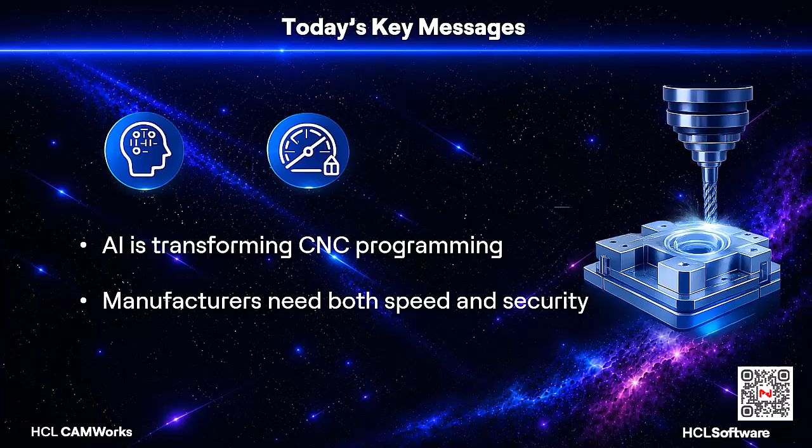Shops need faster workflows while maintaining control over sensitive manufacturing data. And advanced AI capabilities can be deployed on-premise, keeping data secure and local.

So we have a poll question for you today to start things off, and we'd like to know, how important is it for your CNC programming solution to keep data fully on-premise, not in the cloud? So why don't you let us know how you feel about that, and we'll go ahead and issue that poll. Hopefully you're looking at that poll now.

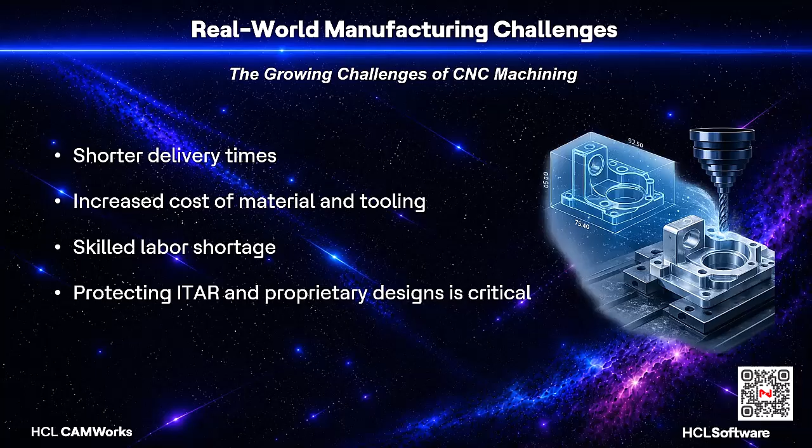So we have another poll question for you that's related to that. Let's go ahead and start that poll. What is the biggest challenge that your shop is facing right now? We have a couple of multiple choice answers there for you. But I also want you to know that if we missed your biggest challenge, you can also type it into the chat.

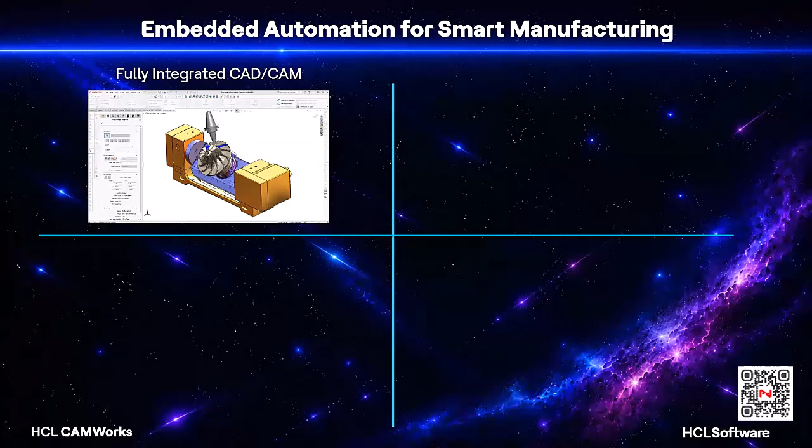All the CAD and CAM data is stored in a single file, and the CAM toolpaths are fully associative to the design model, so if a change is made to the design, the toolpaths will update automatically. CAMWORKS also includes feature-based programming. Unlike traditional process or operations-based CAM systems, feature-based CAM typically reduces programming time by 70% or more because multiple operations are created automatically for each part feature.

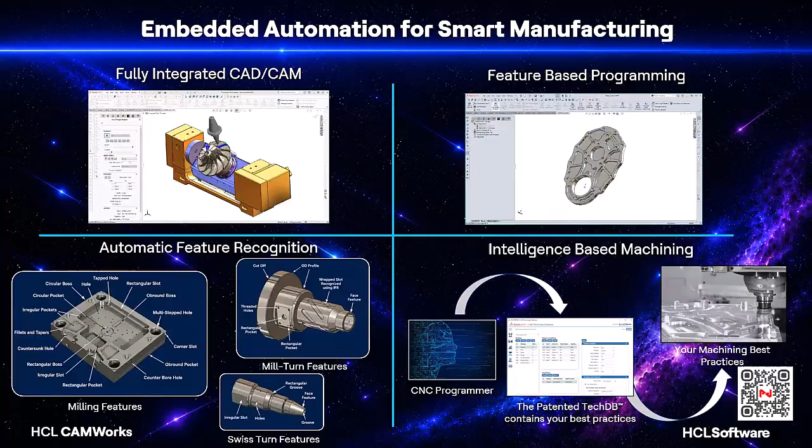And CAMWORKS also includes automatic feature recognition, and it's able to recognize over 40 different types of machinable features. Milling features, along with ID and OD turning features, are automatically recognized, as well as mill turn and Swiss turn features. And intelligence-based machining allows users to capture their best practices and reuse them later automatically. So next, let's take a look at this technology in action.

So here's a transmission cover that is in SOLIDWORKS, and you can see there's machining on both sides of this part that would be required. So a couple of setups. I'm going to go to the CAMWORKS feature tree here and then extract the machinable features on the part. So this will find all the machinable features automatically and put them into the feature tree.

I'm going to go ahead and generate operations here. And that generates all the operations. And then we can generate the toolpaths for machining. So very quickly, we're able to find all the machinable features, generate the operations for those features, and then create toolpaths to machine the part.

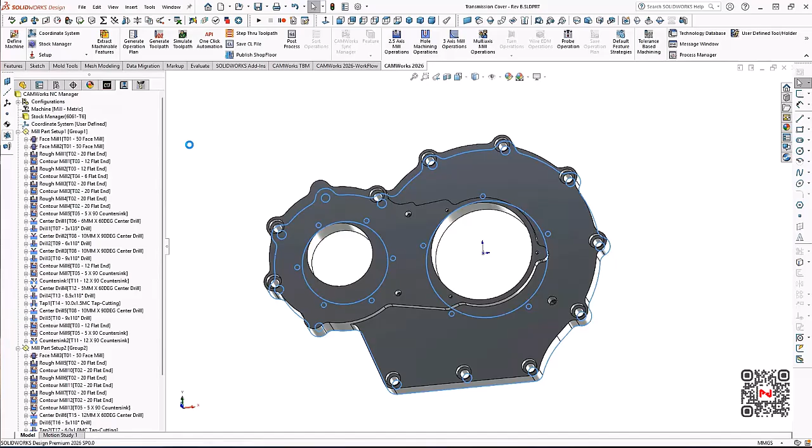And now I can run the simulation here, and you can see the part being machined virtually. So you can see both sides of the part have been machined. So 2 setups here. I'll compare the design model to the machined model, and you can see everything is in green, which is good.

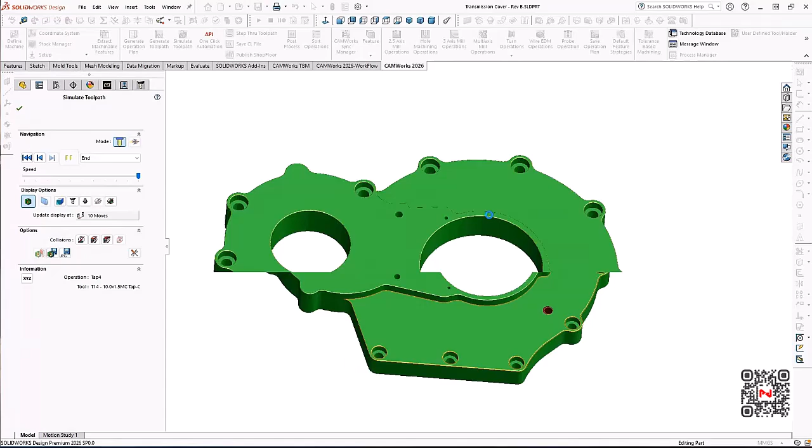And you can also see, if I zoom up here a little bit, let me turn this off. I'll zoom up and you can see where it's also been deburred. So the sharp edges have been chamfered here to deburr the part right on the machine. So all that was done for me automatically. Looks really good.

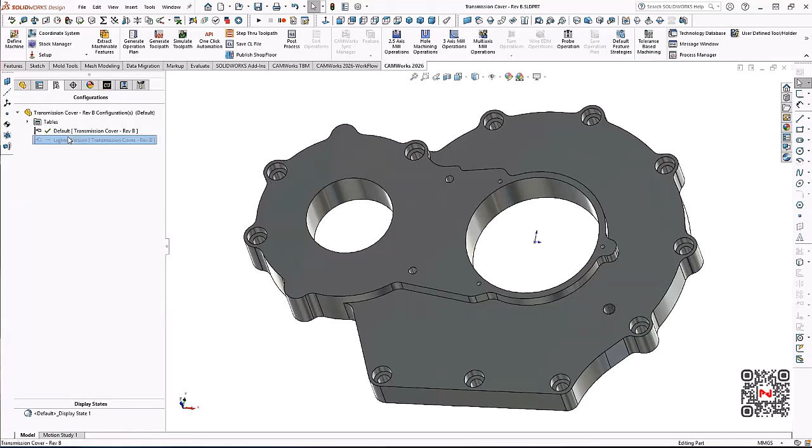Also, there's another configuration here where the part has been lightened. So it has lots of pockets that have been milled or need to be cut into the part. And you can see here where CAMWORKS also supports these multiple configurations. So I'll go to a second configuration, which is the lighter version. The default version is still there.

And now I have this new lighter version, and I'll go through the same process, just extracting the machinable features. And this now will find all the pockets on the part as well in this new configuration. It will extract all the machinable features, and it also finds those features with the fillets as well. And now you can see all the features in the feature tree have been added for the lighter version.

What I'll do now is generate the operations. This is the next step. So create all the operations for machining, and then go ahead and generate the toolpaths. And you can see down here where multiple toolpaths are being generated simultaneously using the various cores on the computer. So it is multitasking, you might say, using multiple cores to generate toolpaths simultaneously. So different operations and toolpaths are being generated simultaneously.

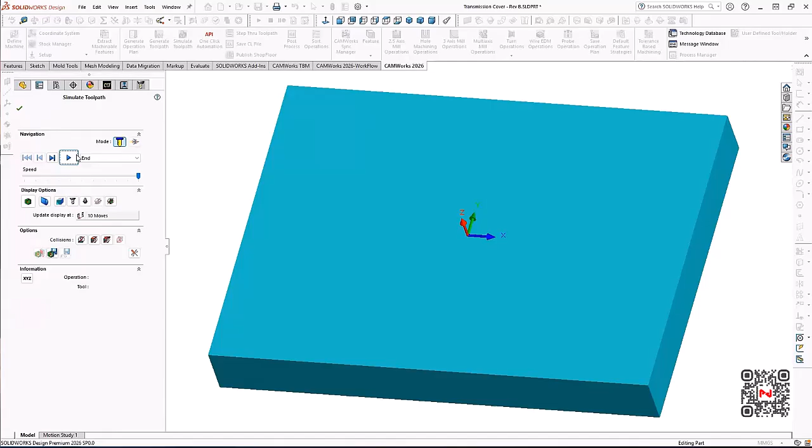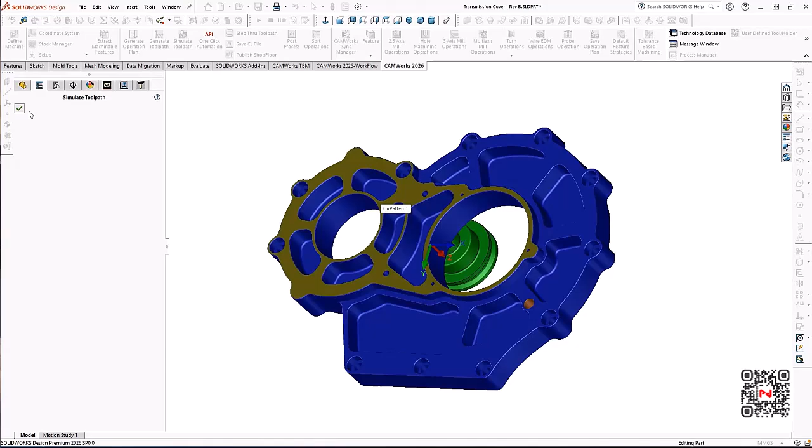Okay, and we can simulate now. And you can see the pockets being machined here with the fillets in the bottom as well. All right. And I can compare the machined model to the design model again, and you can see it's been machined on both sides of the part. And everything looks good here. There's a little bit of red there on some of those holes that were designed as the tap drill. I'm going to go ahead and create the G-code here.

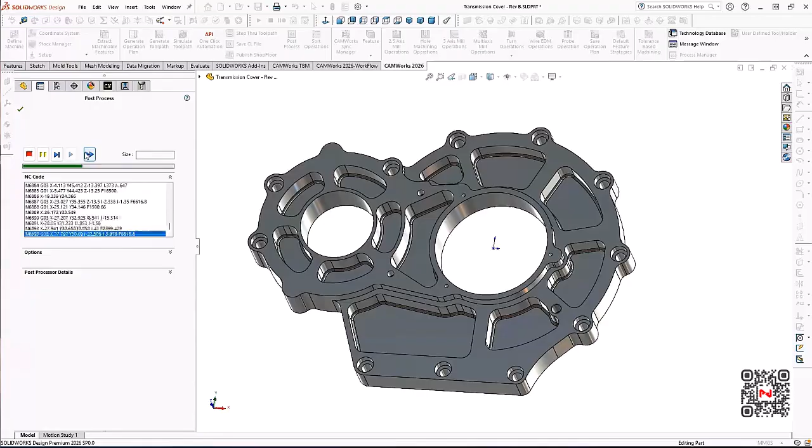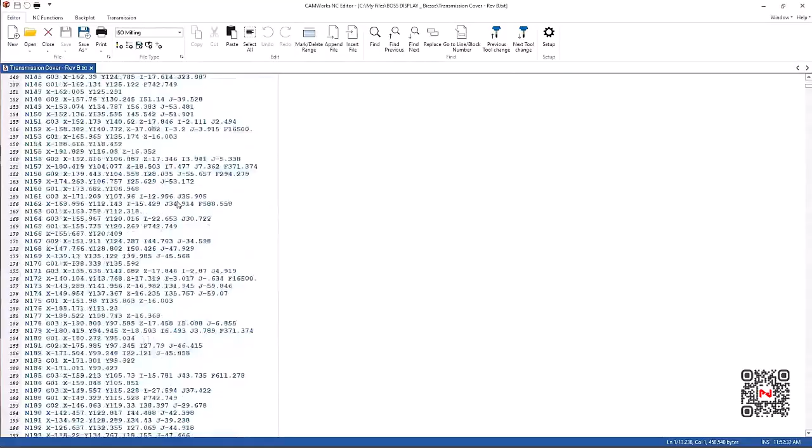And this will generate the G-code for the machine. So you can see how quickly I'm able to program using this technology. And this is all on premise. There's no cloud required. I'm able to program parts nearly as fast, or probably as fast as you could even upload a part to the cloud. So this is very fast for programming. And you can see the G-code here for the machining. This is the NC editor from CAMWORKS, powered by CIMCO. Okay.

So I hope you were able to see how we can greatly reduce programming time, how automated the process really is. As a result, new programmers can work with more confidence because they're benefiting from the technology that's already been stored by more advanced and more experienced programmers, and it allows for more consistent results across the various programmers. So you get away from every programmer having his own idea about what tools to use, and instead things become much more consistent.

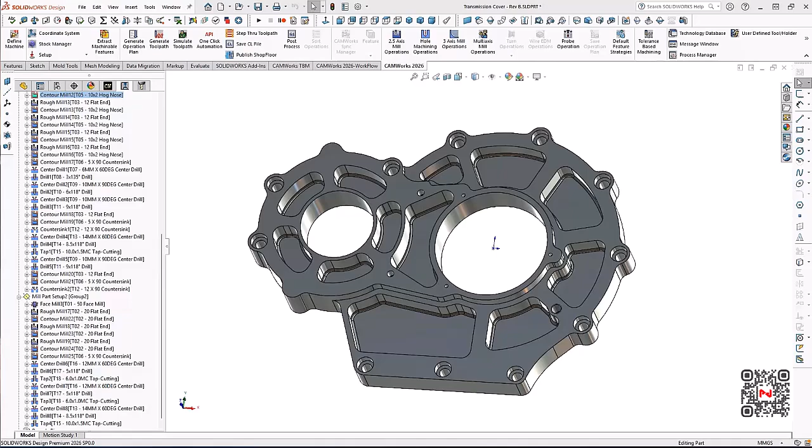It's best to take the best processes, best practices, and use those automatically. And that's what the system is doing here. In fact, we're going to talk more about that shortly. So let me move on.

So what does AI-powered CAM look like in practice? You can store machining strategies while you're working. So as you're programming, every successful program strengthens the automation. And you can build a feature library with proven machining strategies to create an expert system. And these features, whether it be pockets or holes or bosses or slots, any type of feature, once programmed, it's not part dependent. So you could have those same features on other types of parts, and CAMWORKS will be able to automatically program those features.

And it'll recommend the tools and operations and machining methods based on proven past results. And decisions become automated to reduce manual choices and apply established best practices. And the system continuously improves and becomes more efficient as additional data is collected.

So next, let's look at another example of how an expert system like CAMWORKS can automatically select the tools and operations for different size features and how machining best practices can be saved back to the technology database. So here's a part with various size pockets and various depths of pockets as well.

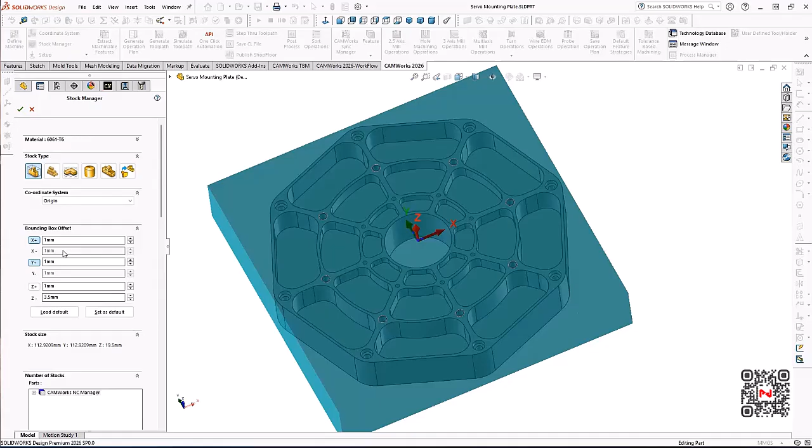And so if I go and look at this and go over to the CAMWORKS feature tree, you can see I have a Haas machine selected. I have my stock defined. It's done for me. And you can see here some defaults, a millimeter on each side, a millimeter on the top of the part, and 3.5 millimeters underneath for holding on to. There's also a coordinate system here that's at the center of the stock.

So I'll go ahead and extract the machinable features here. And now you can see all those and generate the operations like we did before. I think you know the routine here. I might combine the operations. This will help reduce the number of tool changes and also cut down on the size of the operations tree. You can see that there. And then I'll generate the tool paths for machining. And then go ahead and simulate again.

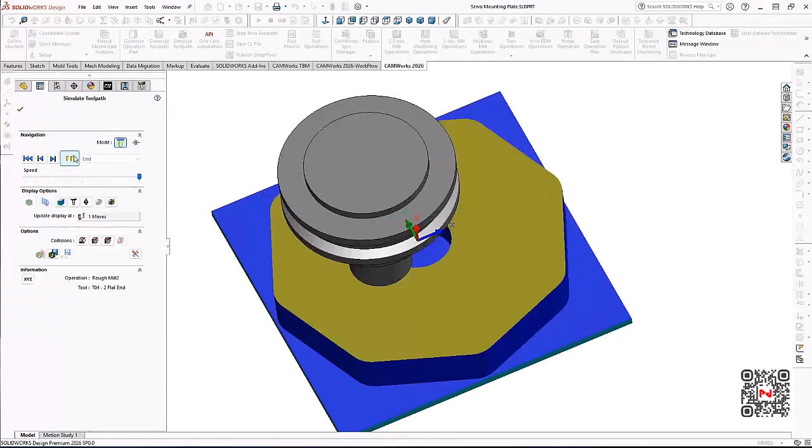And so here you can see where CAMWORKS has automatically selected different size tools for each of the different size pockets and different depths of pockets. It'll also do that for the holes and tapped holes. It'll automatically select the correct tools as well. Okay. So very efficient. You can see here where there's a 2 millimeter tool right here.

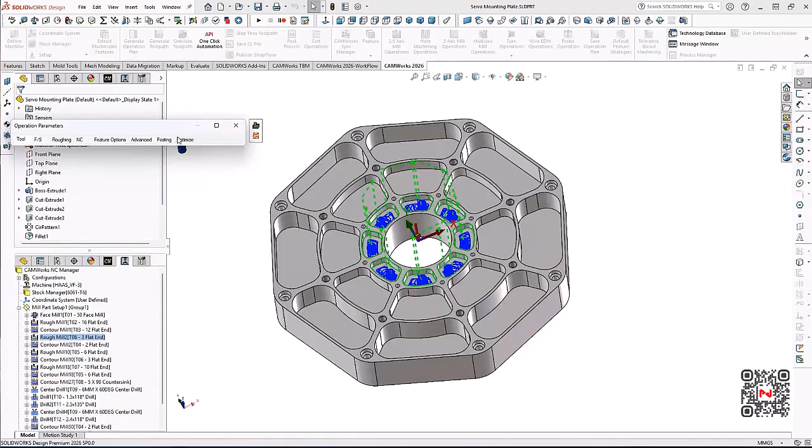Let's suppose I want to make a change here. So I'm going to edit this operation, and I'm going to change the tool, and I'm going to rough these smaller pockets with a 3 millimeter tool. And let's select that and then preview that. So this will rough machine with the 3 millimeter tool instead of the 2 millimeter. Okay. You can see that 3 millimeter tool here.

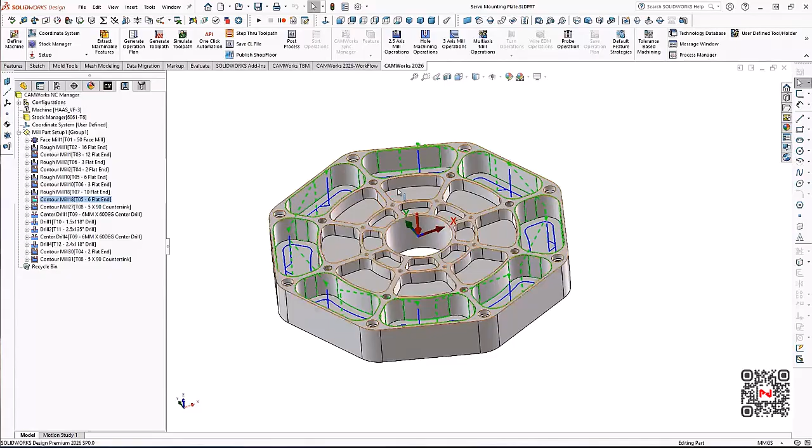Then it'll finish with the 2 millimeter, and a 6 millimeter and a 3 millimeter for the medium pockets, 10 millimeter and a 6 millimeter for the larger pockets. So automatically selecting the tools for me. You can also see where it did the same for the various holes that are in the part as well. So very efficient. And the technology really helps programming parts like these.

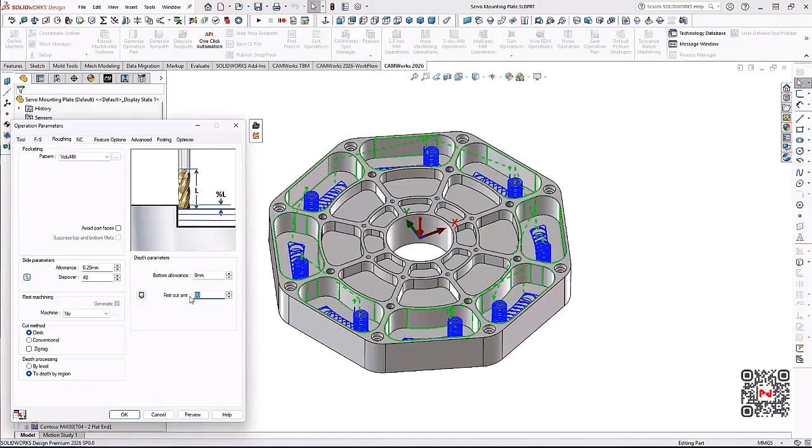Let's also suppose I might want to make another change. Let me edit this rough milling operation. Let's just suppose that at the machine, I had a problem where chips were packing up. So I'll go here, and on these deep pockets, I'll make 2 passes in depth instead of just a single pass. And if I zoom up here, you can see there are now 2 passes in depth there. So this will help with that chip packing out of the machine. Might have been something I didn't realize until I got out to the machine. And so I've made that change.

And you can see here, that's irregular pocket 17. I'm going to go to that feature in the feature tree. And I'm going to save that operation now back to the technology database. And I'll do the same thing for the 3 millimeter tool that we used on pocket 1. Let's save that strategy back to the technology database so that all future programs will now use the 3 millimeter tool for roughing on the small pockets, and it'll make 2 passes on the larger pockets. Okay.

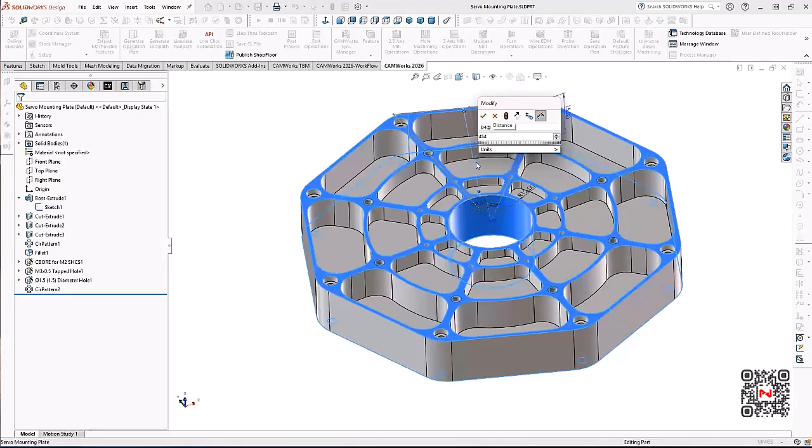Let's also suppose there might be a design change. So I'm going to go here and let's change this dimension. Let's make this 45 millimeters, and you'll see where the outer pockets, larger pockets, will get much larger, and you can see that there.

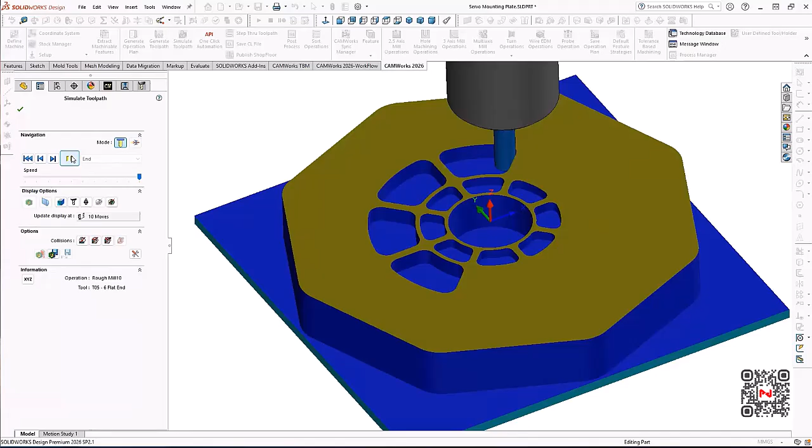And then if I go back to CAMWORKS, it'll automatically recognize that change and automatically rebuild the toolpaths for me. So the toolpaths are fully associative to the design model, and you can see how quickly it can accommodate those design changes, so revisions. And here it goes ahead and machines again.

And if I compare the design model again to the machined model, you can see everything looked good there and looks great. So it's all been updated. And so I hope you can see how one improvement will benefit all the future programs.

And programming consistency is maintained every time it sees pockets of these sizes or depths or material, or it can be different materials. CAMWORKS will select the correct tools and so on. And if it doesn't, that's fine. You can go and make a few changes and then save them back to the database, just like I did here. So hopefully you can see how this technology can benefit you.

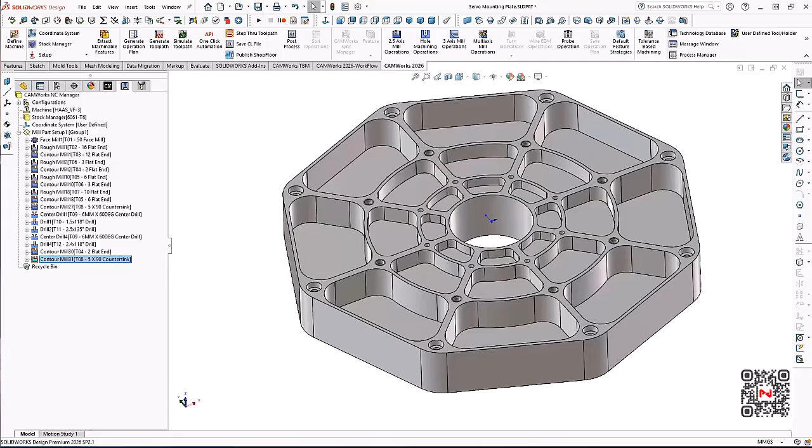If I move on, one of CAMWORKS' strengths is also its ability to support a wide range of CNC machines. So lasers, water jets, and routers are all supported. 3 to 5 axis vertical and horizontal mills of all types really are supported as well.

Both 2 and 4 axis CNC turning centers, or lathes, are supported, as well as complex mill turn and multitasking machines. And Swiss-style CNC machines are also supported, as well as 2 and 4 axis wire EDMs even. So a really wide range of machines that are supported using CAMWORKS.

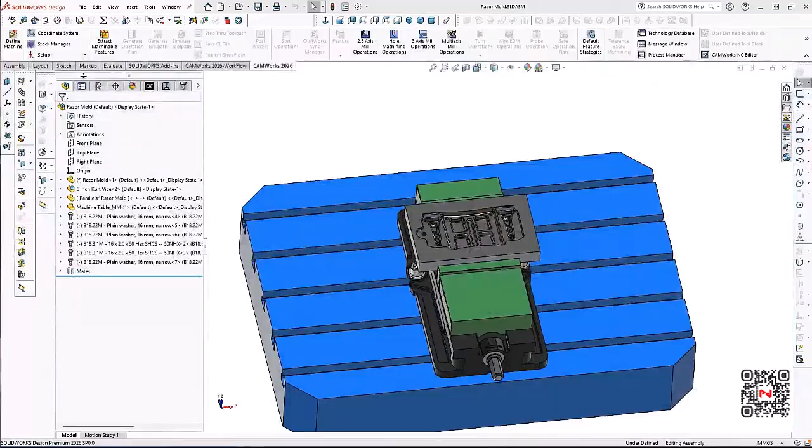And now let's take a look at how CAMWORKS can be used in SOLIDWORKS assembly mode to program a cavity in a mold. So here's a packaging mold, a vacuum packaging mold. You might recognize that this would be for razors and some packs of razors that would be inside this clear plastic packaging. So this might be a mold that we want to machine.

You can see here that I have the Haas VF3 selected again. The stock is just a bounding box here, and the coordinate system is at the center of the stock. And here I can go ahead and create a setup, and then create a multi-surface feature for machining the mold. And I have a strategy already created for these types of molds, and I'm going to select that strategy and then say all displayed.

So this will say I want to machine the entire mold, and then go ahead and generate the operations for machining. And you can see the operations here. So the first one is a 12 millimeter roughing operation, and I want to create an avoid feature. I don't want it to rough the top of the part. I said all displayed, but that includes the top of the part. So I want to tell it here that I don't want these operations to machine that flat top.

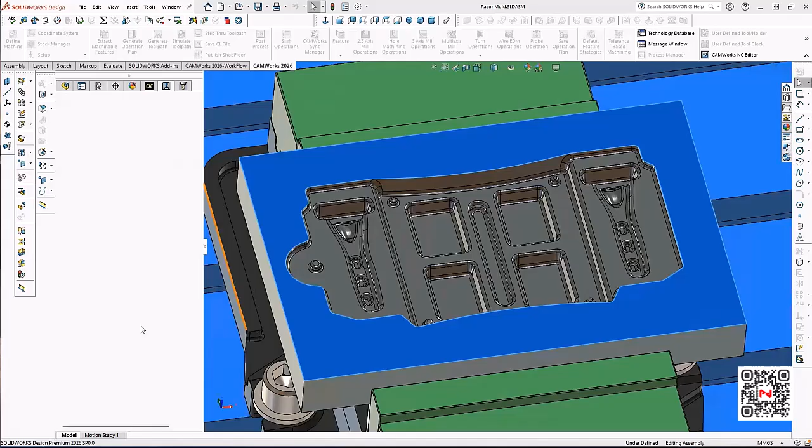We're supposing that this is already a machined blank, ready to machine the cavity into. So here I'm turning on that avoid feature that I created so that those operations won't try to cut the top of the part. And now that I've done that, I can go ahead and generate the toolpaths.

And you can see, several roughing operations here. It's also doing rest milling. And down here, you can see it is currently calculating multiple toolpaths. And right here, you can see that WIP, the work in process, which is the rest machining. So the subsequent roughing operations are roughing only the remaining stock after the initial, in this case, 2 roughing passes.

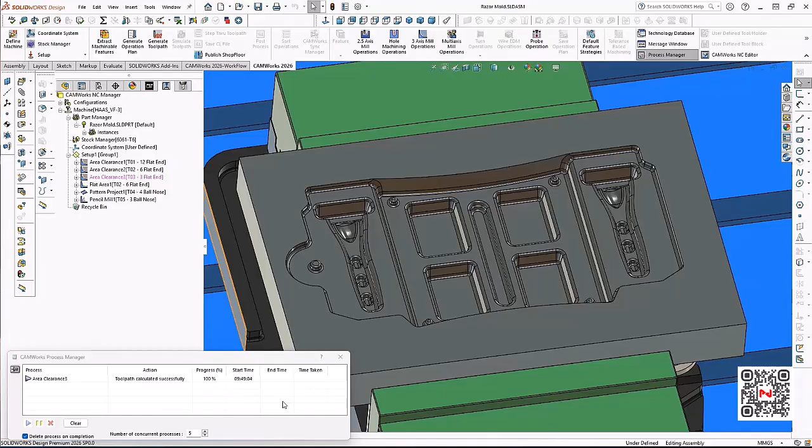So I have a 12 millimeter roughing tool, a 6 millimeter, then a 3 millimeter roughing tool. So you can see all the different toolpaths being generated here. It's just about done. There we go. And you can see here the 12 millimeter roughing, the 6 millimeter roughing, a 3mm roughing tool, then a 6mm to machine the flat areas on the mold, a 4mm ball nose is used to machine, and then 3mm for pencil milling.

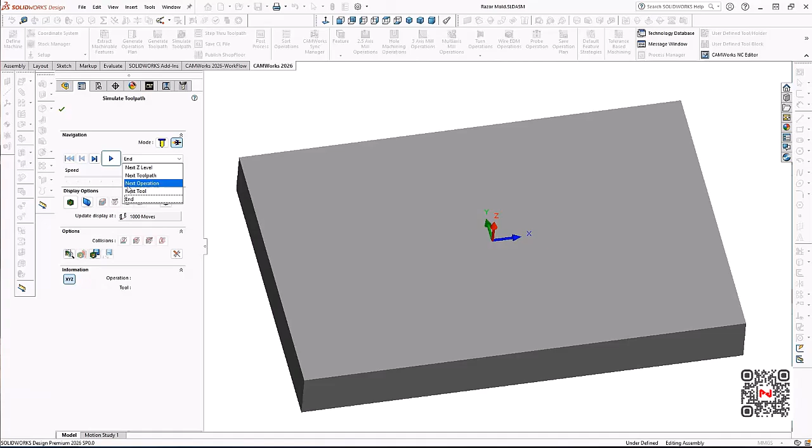I'll go ahead and simulate this. I'm going to turn on turbo here so it'll be a little faster. That's what the turbo mode's for. Let's also set this so that it is for the next tool. This will show us after each tool. So that's what it looks like after the 12mm roughing. This is what it looks like after the 6mm, and then the 3mm, and then the flat area. I'll just keep clicking here.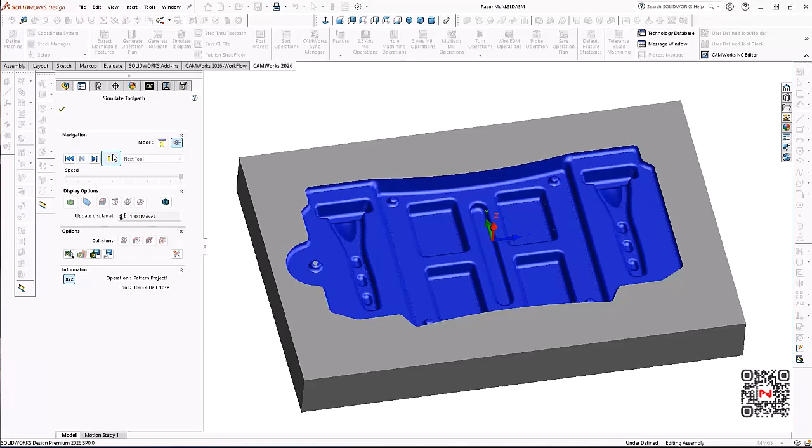Now you can see it's doing the 4mm finishing across the mold. It's also doing some cross machining here as well. So I used a pattern project, but it also automatically calculates cross machining where it needs to be added in order to give me a better, smoother finish.

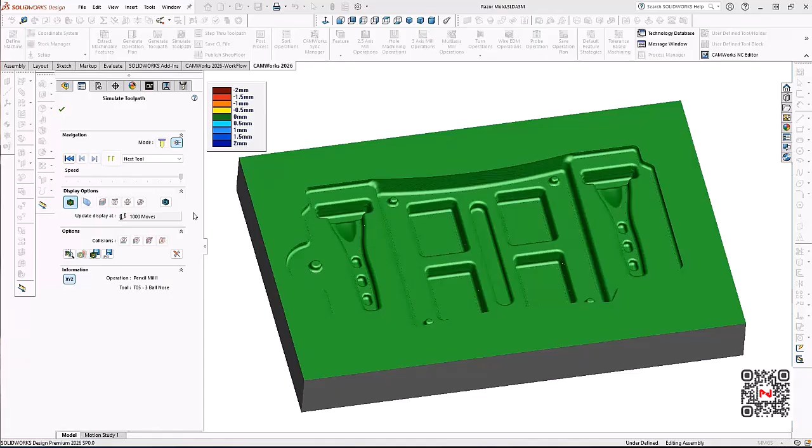And then it did the pencil milling here. So it's working on that, and now it's done. And now I can go ahead and create the, there we go, compare the design model to the machined model, and you can see everything in green is good. If it had any remaining stock, it would be in blue, and if I had gouged it, it would be in red. So I'm going to say okay here.

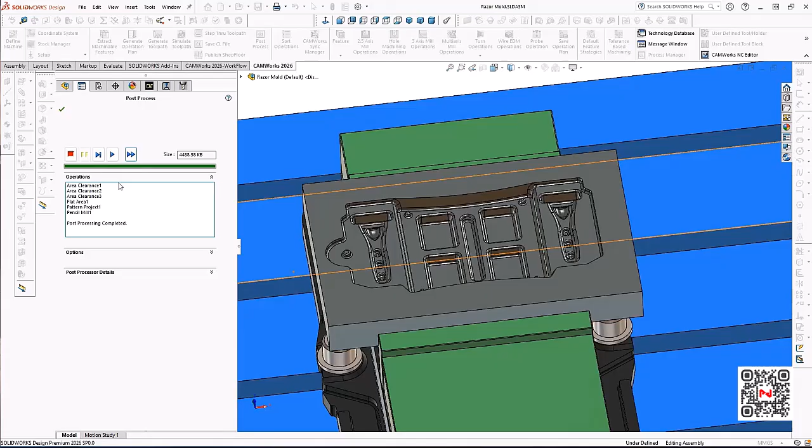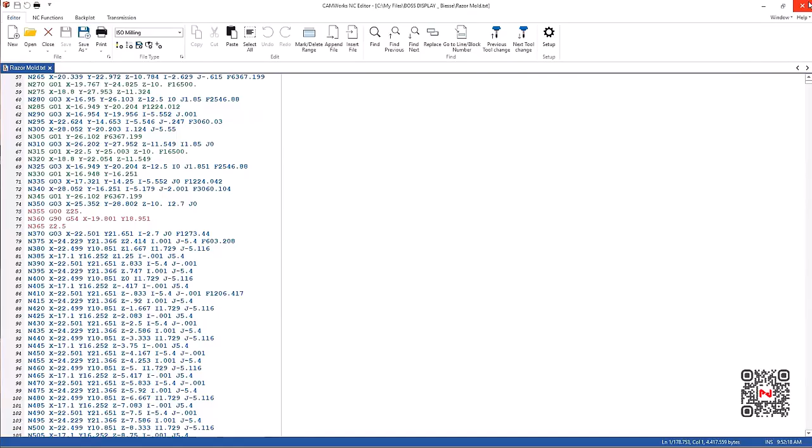All right, and so you could create these strategies, and I'm going to go ahead and post here and generate some code. But I want you to know you could create these strategies for machining different types of molds, and you might add tools and put in some more finishing tools, and leave out some tools. Maybe you want more roughing tools or more finishing tools to create a better finish or better mold. You can decide your best practices and store them. So you can see the G code here.

Okay. So I hope you're getting an idea of how you can automate the programming process, how you can store these strategies back to the technology database for reuse later. You can create as many of these strategies as you like and name them, give them different names that you can recognize, and you can create a library of these strategies for machining the types of parts that you're machining on a regular basis. Okay.

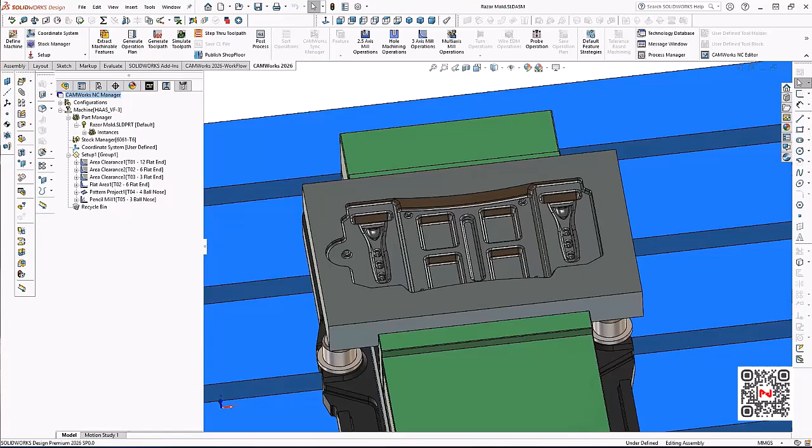Okay, so next, let's just discuss a little bit about the Swiss machining. CAMWORKS Swiss machining supports advanced Swiss types of machines, and it's designed to improve programming efficiency and accuracy and confidence. So full machine simulation is available right inside SOLIDWORKS to verify the machine motion and detect collisions. Integrated machine-aware programming. This allows users to be able to see the machine while they're programming. So the programmer can consider the machine constraints and also reduce setup time and rework.

And a powerful segmentation manager is included to easily divide long parts into manageable machining segments. And the sync manager has been enhanced to improve synchronization and improve control of simultaneous operations. And advanced operations and toolpaths have also been added to help streamline Swiss machine programming.

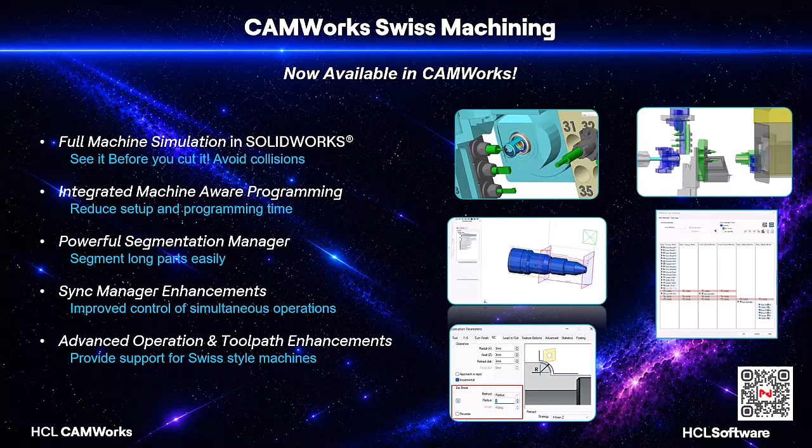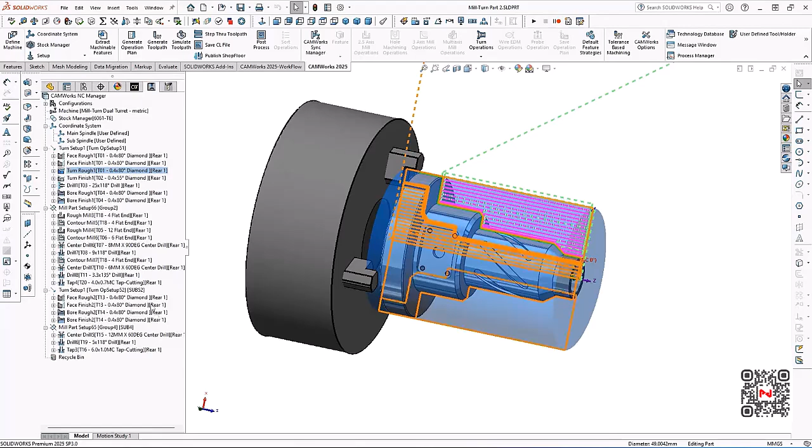So let's start with a mill turn part here. So I created the features already. I've extracted the machinable features. Here I'm going to generate the operations. And you can see the different operations here. Maybe pick one of these like the turn roughing so that we can see what it looks like. The feature recognition works really well on mill turn and Swiss turn parts as well, because most of the features are 2.5 axis type features. And you even saw where the 3D molds can be easily machined.

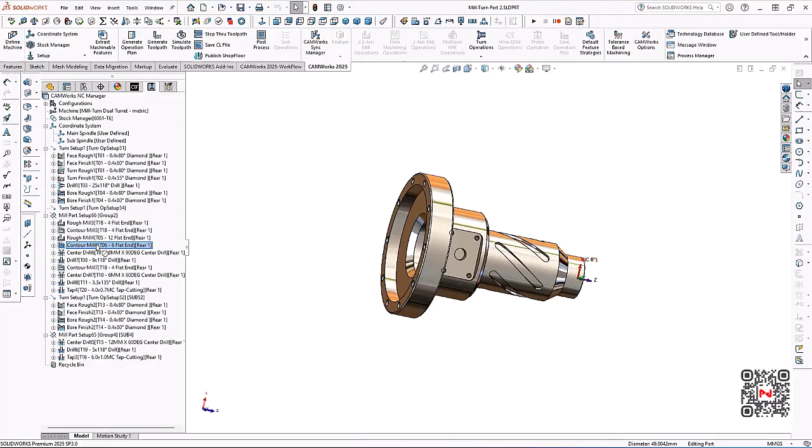Down here, you can see the sub-spindle is also being used. And I'm going to add here a main spindle operation. And I'm going to drag and drop that down here, after that milling op, so that I can create a sub-spindle operation to transfer the part. So I'm going to select standard transfer there, and that will transfer the part from the main spindle to the sub-spindle. Okay. And then I'll go ahead and simulate again.

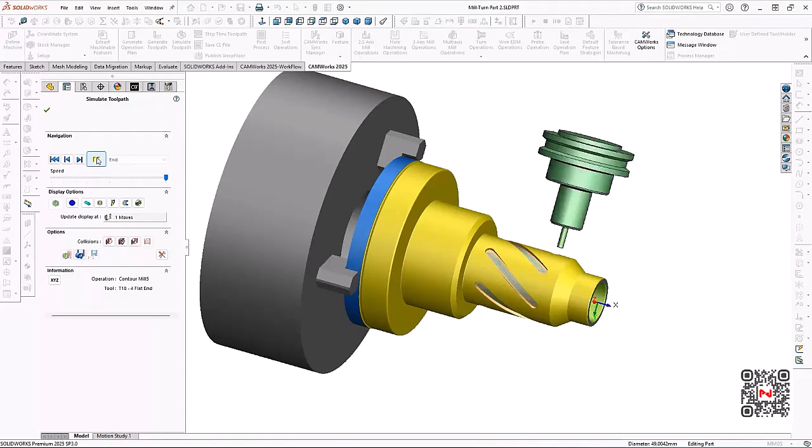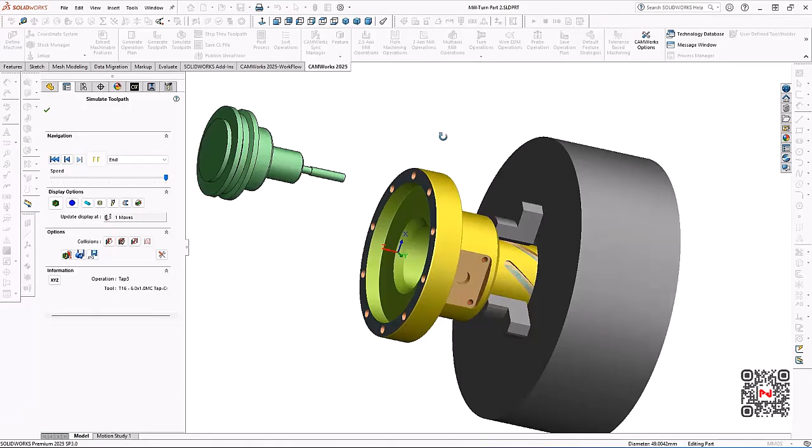So you can see the part being roughed out, the ID being done there. Here you can see the C-axis is being used to machine those grooves. And I might mention CAMWORKS also supports B-axis machines as well, and continuous simultaneous B-axis machining as well. So here you can see it now going over to the sub-spindle, doing the work over on the sub-spindle, doing the boring there, finish boring, and then doing the drilling and tapping there on the backside of the part.

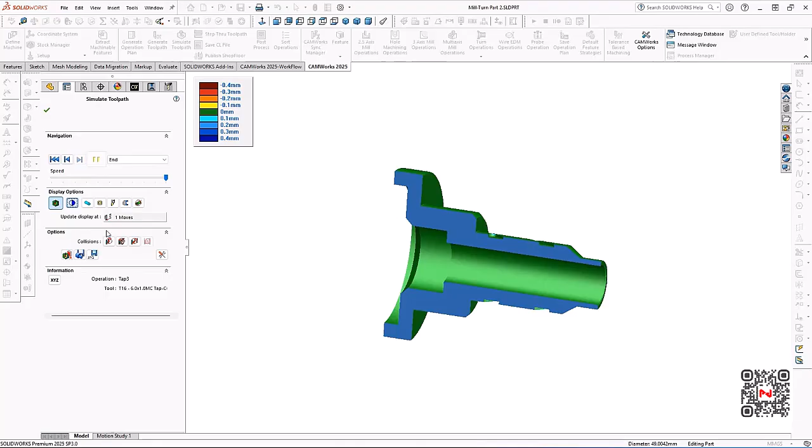Compare the part again. You can see here where if I gouged it, it would be in red. Green is good. And if there was any stock remaining, it would be in blue. Looks good. Let me zoom up a little bit here and split the part in half here. Yeah, there we go. And we can see that the inside has been machined also accurately.

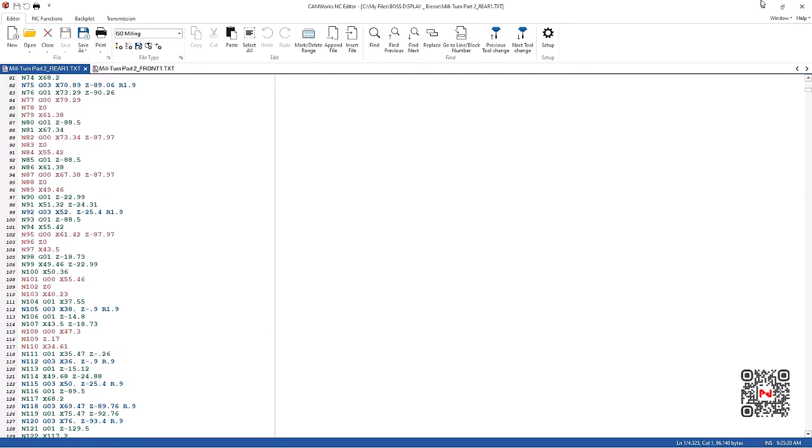All looks good there. We'll go ahead and post-process, generate some code again. And this time just hit fast forward and it generates the program for me very quickly. And you can see here the program ready to go to the CNC machine. Okay. Okay.

Let me now switch over here.

Excuse me, a little dry here in Phoenix. It's a dry heat, as we like to joke.

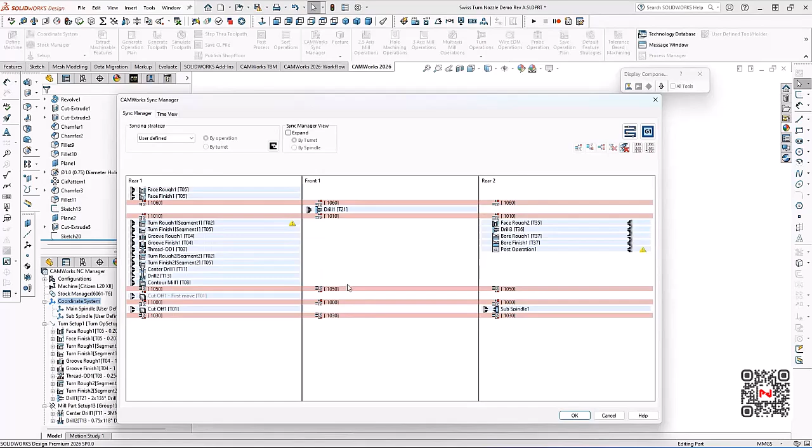We go to the CAMWORKS feature tree. You can see here I've already extracted the machinable features, and just a handful of features are really required for this part, so it doesn't take long. And here you can see I've generated the operations for machining as well. You know the routine, but I wanted to show you the sync manager where I can control the synchronization of the different operations on the main and sub spindle.

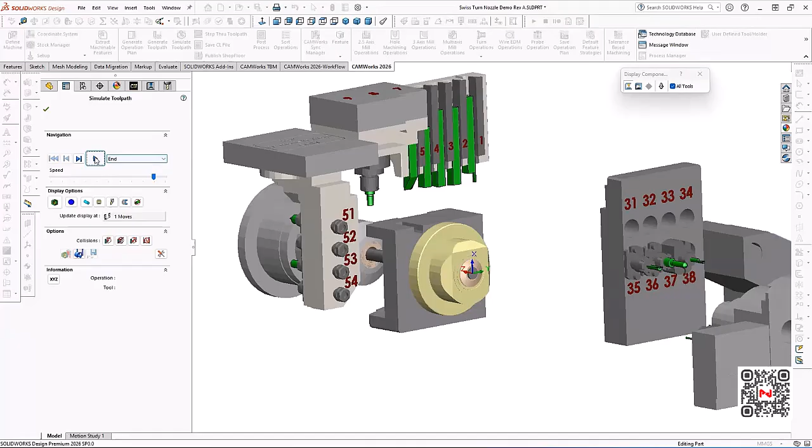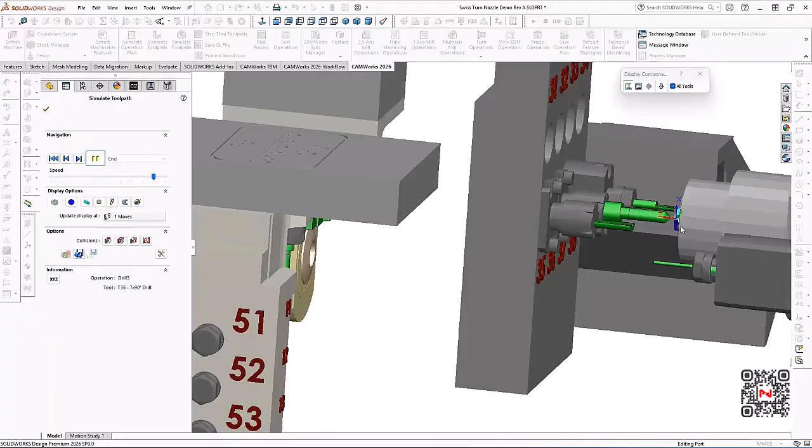If I turn on machine aware and turn on all tools, you'll be able to see the machine here in SolidWorks and CAMWORKS to check your setup. I'll go to simulate and run the simulation. You can also see where I had segmented this part so it would do the part in 2 segments so that it would not come out of the back of the guide bushing. You can also see the milling here, and it switches over to the sub-spindle and does the machining on the sub-spindle as well.

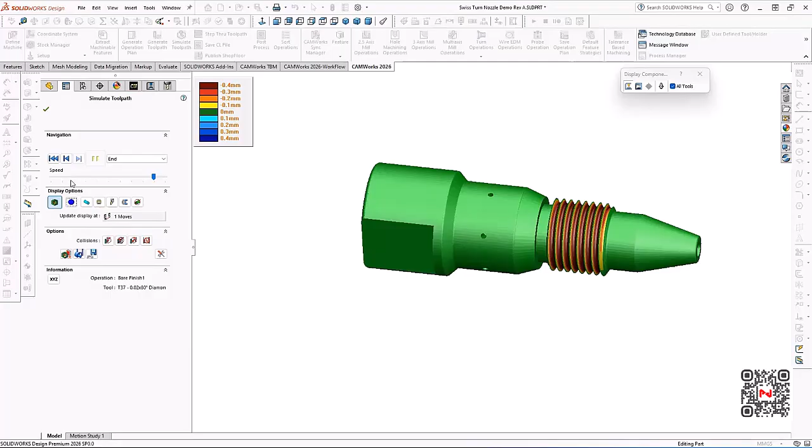Okay. Looks really good. I'll compare the machined model to the design model again. You can see some red there where the part is modeled with the major diameter, and now it's been machined, so it shows the minor as well. Inside the part, it looks good. Turn that off, say okay, and we can turn off the machine aware. Let's zoom back in here, and now you can see the part.

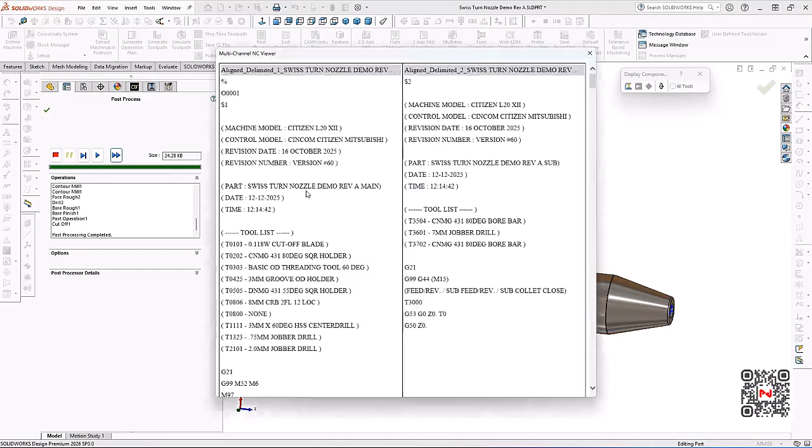Okay, and then we can go ahead and post-process. Let's generate some code for this one. Fast forward again, and say okay. This time you'll see the editor opens up with 2 channels, one for the main and one for the sub, and the timing codes are synced. So I can see exactly what's going to happen on each of the spindles and make any final changes that might need to be made, comments and so on. And everything looks good.

So I hope you can see how for mill turn and Swiss turn parts, CAMWORKS can also maximize the value of your CNC equipment and advanced CNC equipment. It also reduces the programming complexity, and it enables done-in-one machining for a finished part. So, all right.

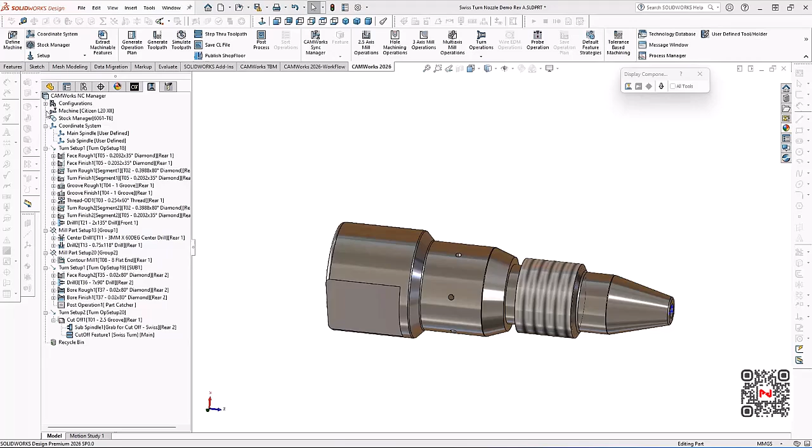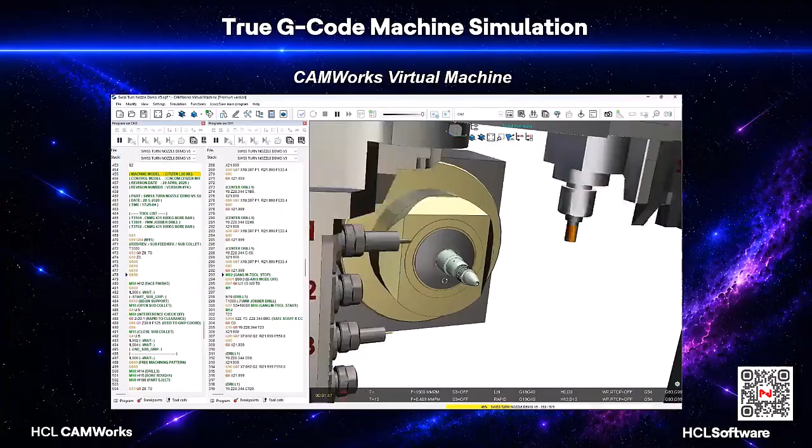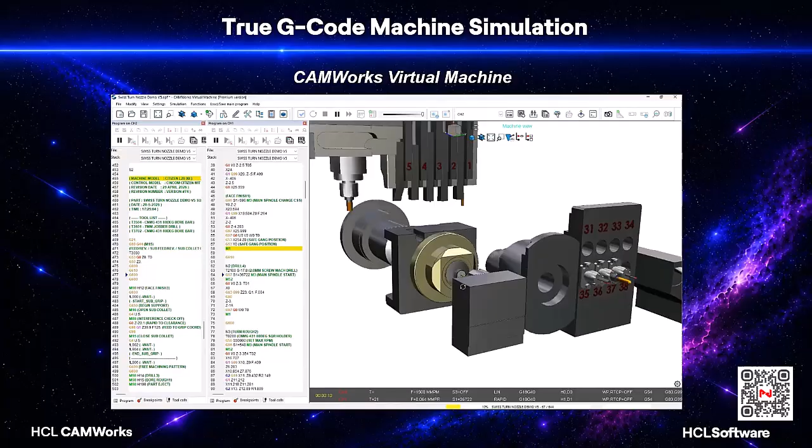True G-code machine simulation is also available for Swiss machines. This is important because of the complexity of the machines. This is simulating directly off the G-code. It replicates the machine kinematics, the tooling, and controller behavior, so it gives a very accurate virtual simulation of what's going to happen on the machine directly from the G-code. That improves confidence in CNC programs and reduces the risk of collisions. It also reduces setup time, and you can reduce scrap as well. So catch problems early and minimize downtime and wasted material. Okay.

Before we wrap things up, I'd like to briefly review the results you can achieve by using this technology. CAMWORKS is not only powerful, but easy to use, and it can help you accelerate programming and reduce lead time. You can reduce cost of both material and tooling using the automation to standardize your CNC programs, and use the patented technology database, or TechDB, to automate the CNC programming process and at the same time improve the quality of your parts.

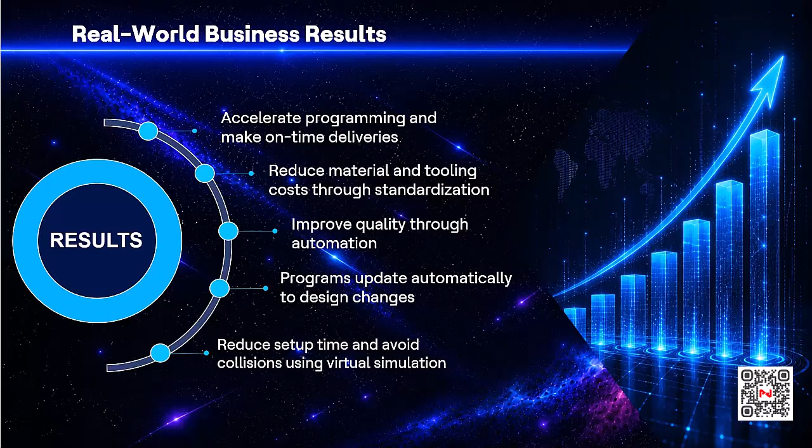Programs will update automatically, so you can meet engineering changes head on and have those programs update automatically to design changes. And reduce setup time, avoid costly collisions, and take a quality product to market faster. A final comment: the CAMWORKS TechDB is a perfect AI platform for future development, and you can expect more automation from HCL CAMWORKS in the future.

The well-known author and entrepreneur Victor Kiam once said, "Procrastination is opportunity's assassin." Implementing the latest integrated CAD/CAM technology will digitally transform your company, and automation's an ideal way to stay ahead of the competition.